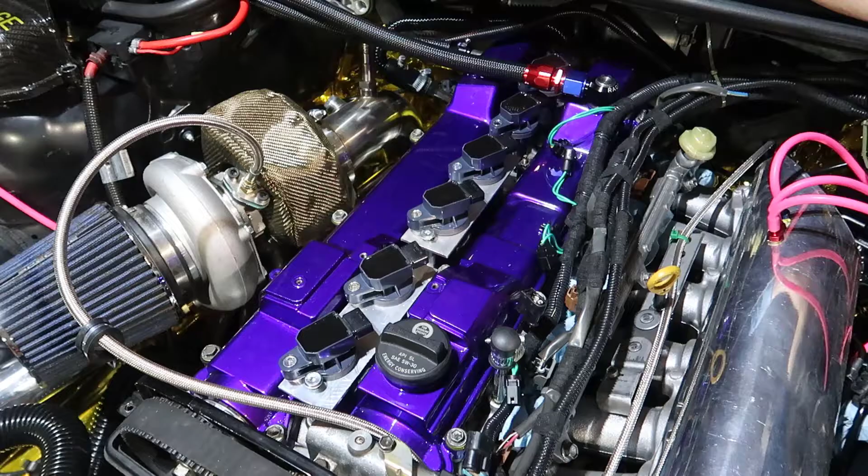Alright, next step for us will be this wire here, this wire loom and all that stuff.

So we have two options. I can rewire all of this and send it that way, which is where the ECU is inside the car, right under the opening on top there where the airbag was supposed to be. That would be faster, quicker, and closer for us. So that might be my route.

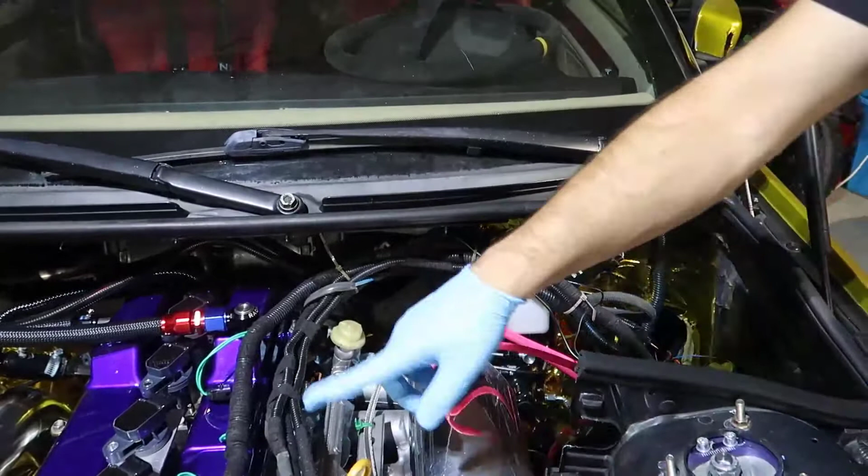Or we can still go this way, but then we go all this way, and the wire goes all the way up and across. I guess we can save wire, and the longer the wire, the thicker it has to be and all that stuff. So I'm gonna cut this here.

Let's undo this one here. Alright, so I managed to bring the wires straight from the ECU through the firewall and up here, which is going to be easy to hold somewhere, to hang it in here, and then come straight down. I don't even need to put the wire loom outside of this spot, it can be even underneath.

Yeah, it's gonna touch the engine. Yeah, I might need to just hang it in here, and I'll have the connectors. The connectors also have wires, so I'll need to trim this wire a little bit. But yeah, it looks great.

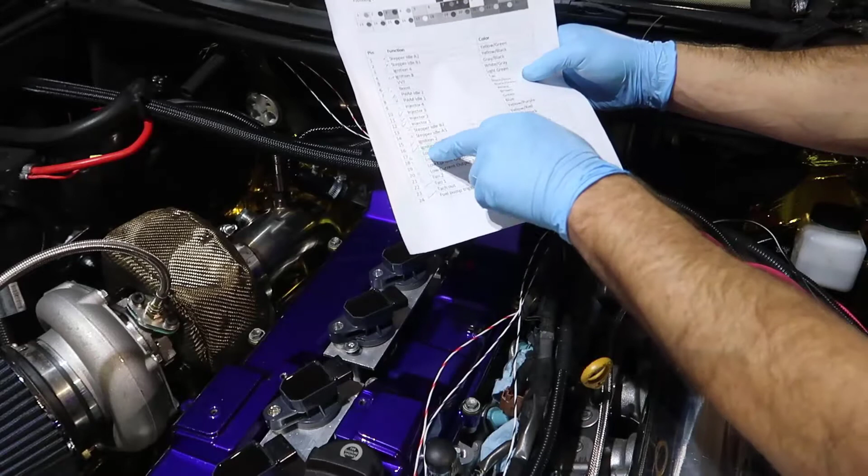So we have the signals. I need to check which is what, but basically, so much drama. I have ignition 1 is white and red, ignition 2 is white and black, and ignition 3 is white and gray.

So this is ignition 1, which is 1 and 6, and then we have ignition 2, which is white and black, and ignition 3, which is white and gray. And so we have that.

We need 1 power and 1 ground. So I'm gonna bring 1 ground from the inside, 1 power from the inside, and basically that's all we're going to need. I'm gonna share the power and ground between all of those, but this is the only thing that I need to merge.

I gotta join those two together, those two together, and those two together, because when the ECU sends the signal, it's going to send to this one and this one at the same time, and this one and this one, and this one and this one.

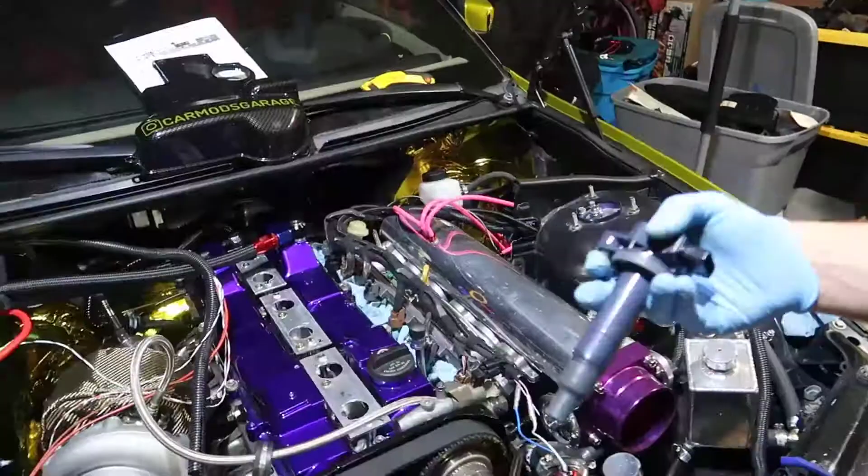Done? Let's do it. The only thing we need to understand is looking at a coil like this. This is pin 1, 2, 3, and 4 — 1 on the left, 4 on the right. Number 1 is ground, so this side is ground.

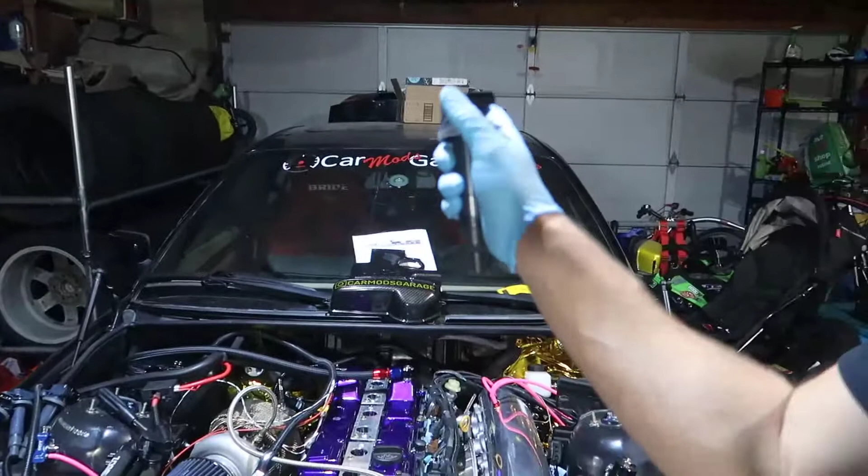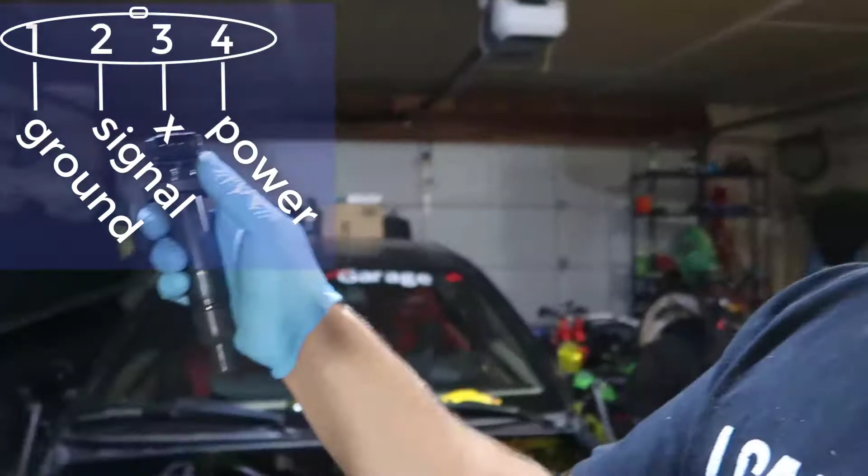The second pin is the one that goes from the ECU to trigger this. The third pin we are not going to use, which tells the ECU that it fired correctly — if it doesn't send that signal, or sends a signal saying it didn't fire, there's a code on the dash. We're not going to use that. And the last one is power all the time.

So ground, power, and close to the ground is the ECU. We're going to wire it now.

So I have my solder iron warming up. I got a piece of wire. So let me show you how this looks now. So I put the connectors in there.

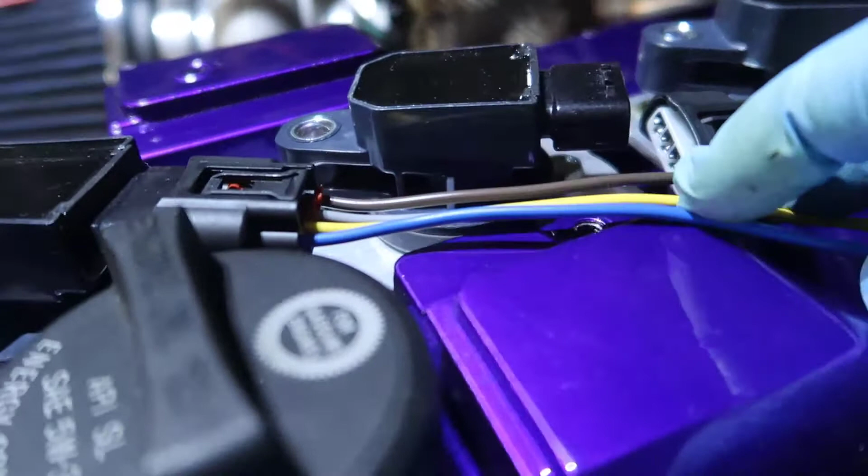I got the connectors here, and I know again that number 1 is negative. This is the wire that goes to the ECU. The gray one is not going to be used, and this one is the 12 volt.

So I'm going to get the 12 volt and split it in 3. Those first 3 are going to have 1 wire, and the other 3 are going to have another wire, and at the end I'm going to merge all those wires in here, just so I can have some flexibility on the wires.

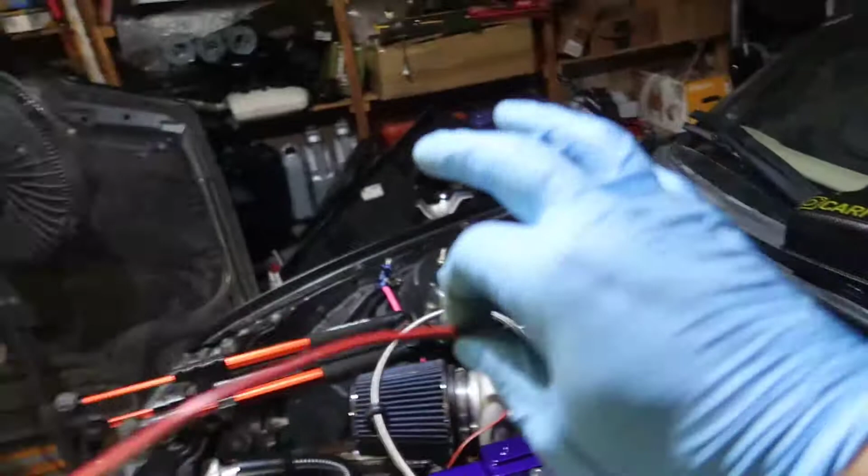So I'm going to solder this first one right in here. Then I'm going to go to the second one, see where it ends, and open a little gap in here, and solder the other one in here. I'm going to open a gap, but enough so I can put a heat shrink still and heat it up so it gets very tight.

So yeah, let's get the first one. So don't do like this, because if you burn your knees, it's on you — it's not my fault.

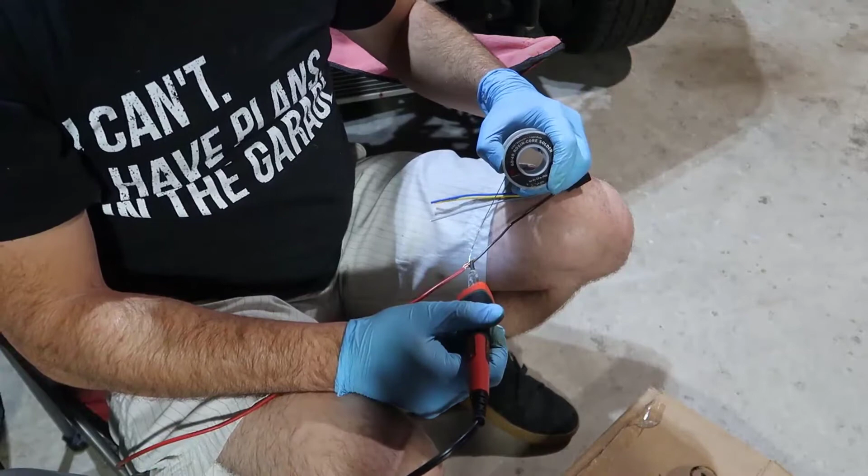So this is, oh, it's hot. So this is all coated. Now I'm going to put a heat shrink, and this is going to be good.

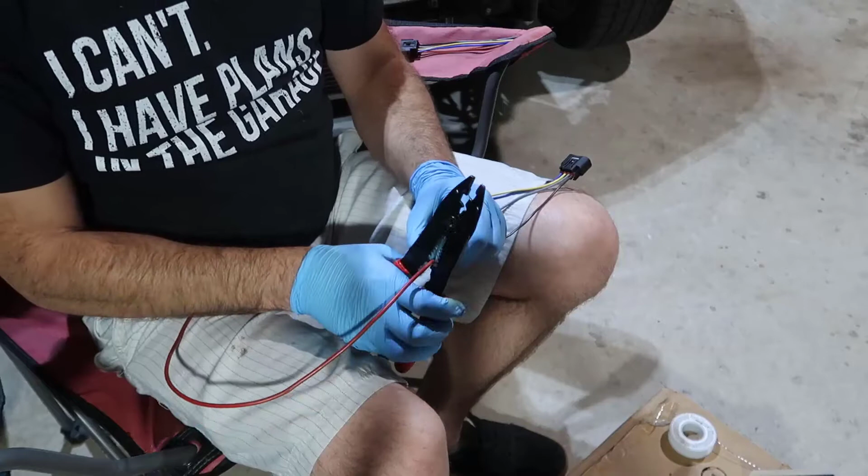And then we're going to go to the second one, which is going to be somewhere around here. I measured the second one. The second one is going to be soldered right in here. So this is the trickiest thing now, because I need to take a little piece out of there, but not a lot. So I need to be sure that this is cut through.

There you go. I don't even know if this is the right way to do things. It's just how I'm doing it.

So now I want to make this go inside that, and then I'm gonna wrap around. And this is gonna be pretty solid. I just need to be sure that all the sides are coated. There you go.

Alright, and now same thing. We got a little heat shrink. Let it cool for a minute, because if the heat shrink gets in there, it's going to shrink before it can go through this big chunk.

But yeah, it did. There you go. Now we're gonna shrink this and go to the third one.

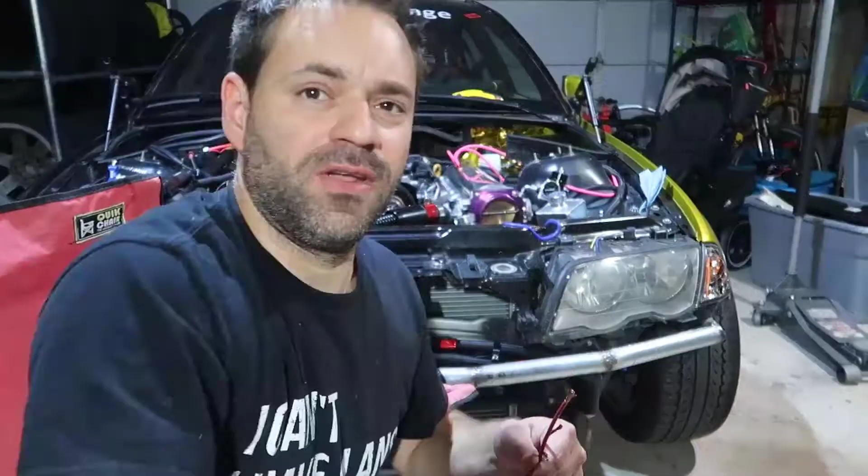So as I was doing this, I decided to do one full on 12 volts, so that 12 volts feeds everybody. So I have 5 in here, and the sixth one I'm gonna put at the end. I might put it together as I'm soldering with the one that's going to go through the firewall. Otherwise it's one more cut, one more everything.

I mean, I could do that regardless, but my plan now is to get 2 ground wires. I'm going to split the ground wires in 2. So I'm going to get the 3 first ones, and share a ground wire with those 3, and I'm going to get the 3 second ones and share the ground wire between those other 3. Those 2 ground wires go to the ground that is right there inside that little compartment.

You're gonna see when we get there. So I'm gonna do the same thing. I cut and solder that way we were talking about. So you see here the Italian clothes hanger thingy.

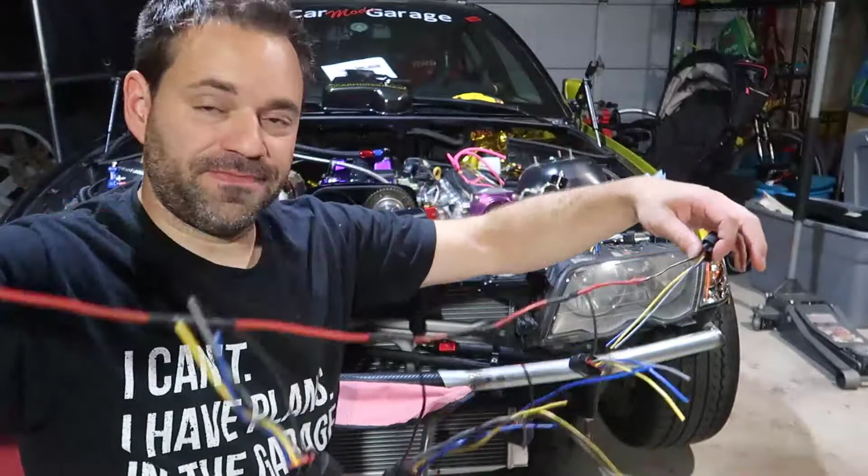Yeah, so let me do the ground now. By the way, the ground is blue, which is number 1. So we did number 4. Now we're gonna do number 1.

Alright, so this is how it looks like now. I have positive running through all the terminals. I have negative through the 3 first terminals, which is pretty organized, so I can group them together. Of course, if you're grouping it together, I can group them, and have a thin wire loom running through the engine, the head of the engine.

So I'm gonna run the second ground. One disadvantage of doing this thing that I'm doing here, cutting and opening a space and all that stuff, is if I mess up and break any wire from the inside, it's no good. So I need to basically throw the whole positive or the whole negative away and start it again.

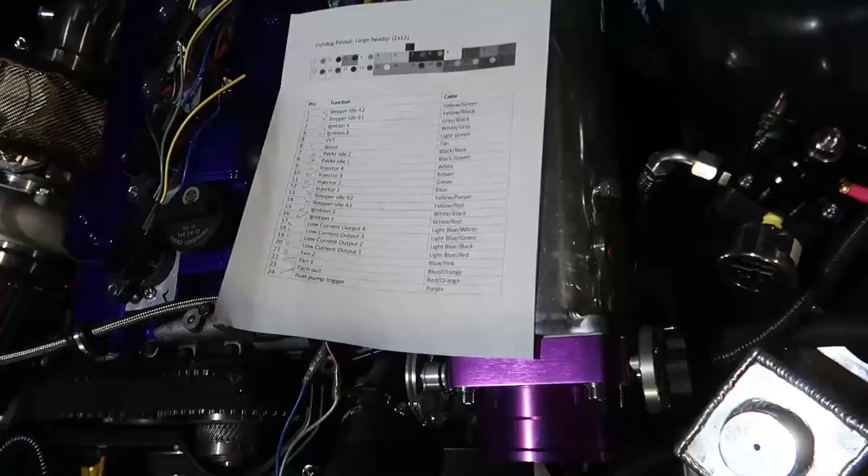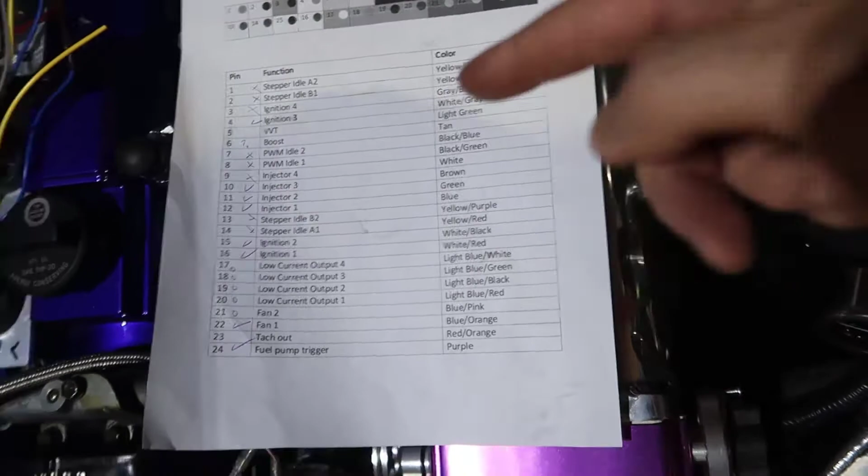So let me do the second one, and the last one will be the yellow. Okay, my idea now is get the ignition. So you have ignition 1, 2, and 3. 4 is white and gray. It doesn't matter which pin is there, but it's white and gray. So I have there, coming from straight from the ECU, white and gray, and it's long enough.

So my idea is to route this guy - sorry, I'm doing this as I hold the camera - route this guy through here on the wire loom that I don't have yet in there. Then I'm gonna route through here, right?

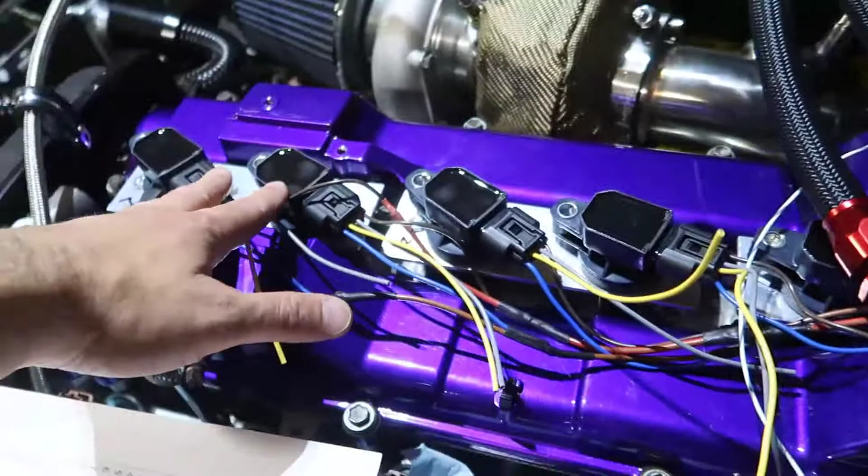And I have enough. So I'm gonna get the yellow here and the yellow here, which is 3 and 4. So 1, 2, 3, 1, 2, 3, and 4. I don't even know how to count. 1, 2, 3, 4. So 3 and 4 together, I'm gonna get those two and wire them together straight on the ECU.

All right, one is done. I gotta do the other two. It's gonna be pretty clean, and it'll let me start my engine, so I'm gonna finish those tonight. It's 12 o'clock already, I won't be able to start the car tonight, but I'm excited.

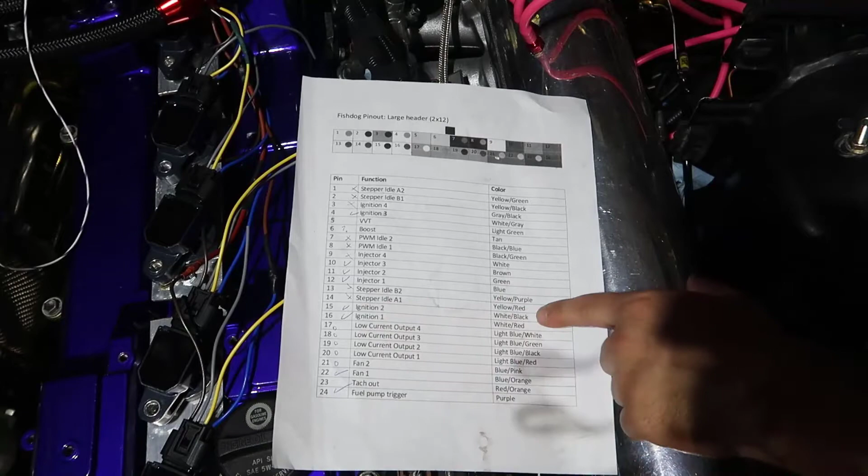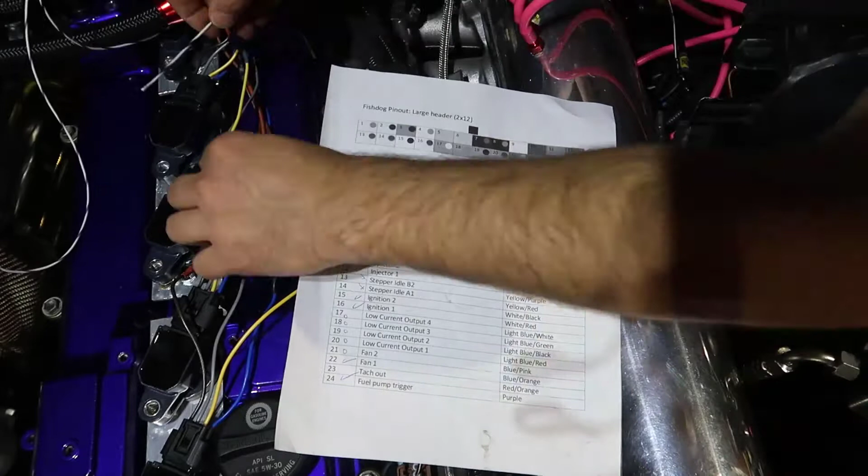Let me finish that. So ignition 2, pin 15 is white and black. So white and black is going to be the one that merges 2 and 5. I'm gonna do exactly the same thing: put 2 wire looms in here, solder in there, and do the same thing to the 5th one, which is right in here.

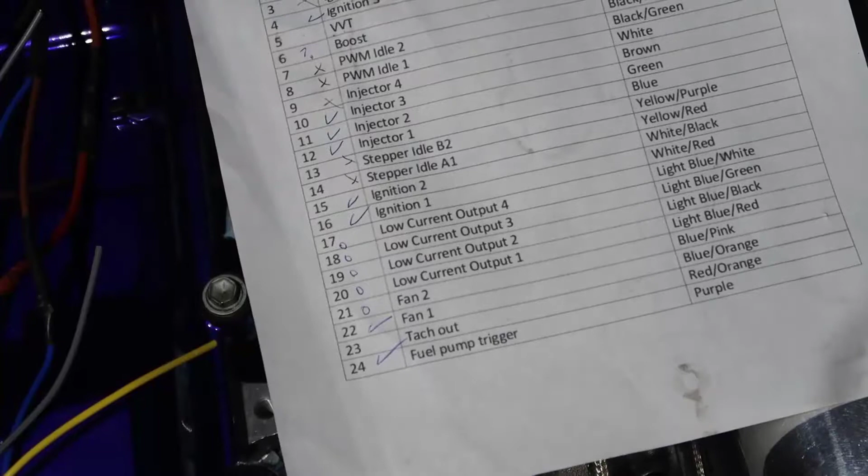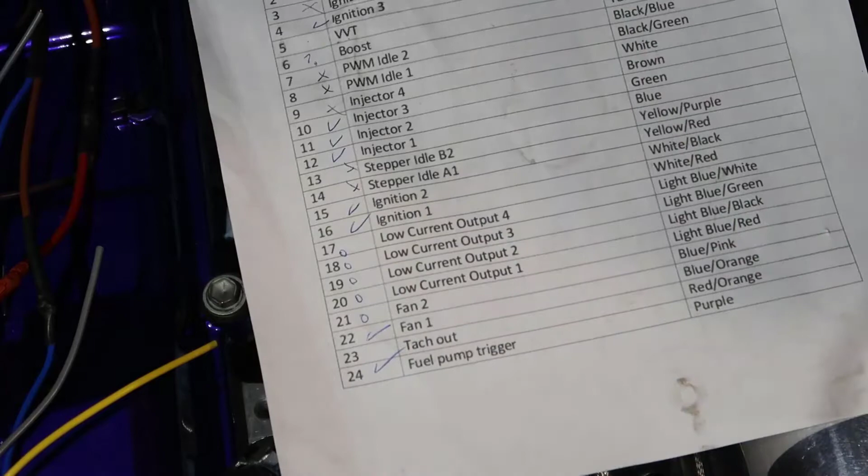And to finish, we have ignition 1, which should be the first one, right? Which is going to use the white and red, so this one is going to connect the first guy and number 6. All done. The battery died on the last one, but yeah, I got it done.

Just to confirm, we got the paper here. Ignition 1, white red, should be connected to number 6, which is outside here, so it's perfect. Then we have 2, white and black, connected to 5, also done. Then we have ignition 3, which is white and gray, connecting 3 and 4. So yeah, this is all done.

That is how we upgraded from the old style thingy to 6 coils, and we use smart coils. This here I'm not gonna use for now, but if you have an ECU connecting to the normal ECU, this is actually the return. You gotta put them all together in one and then go that way.

We're just gonna put the wire loom and wrap it up, but dude, that's way nicer than I expected. It's a little bit more organized. I put one wire loom in here, so we need another one that will merge into this guy, and so on. As you see, it's gonna be pretty clean, and I can just tuck this guy in there.

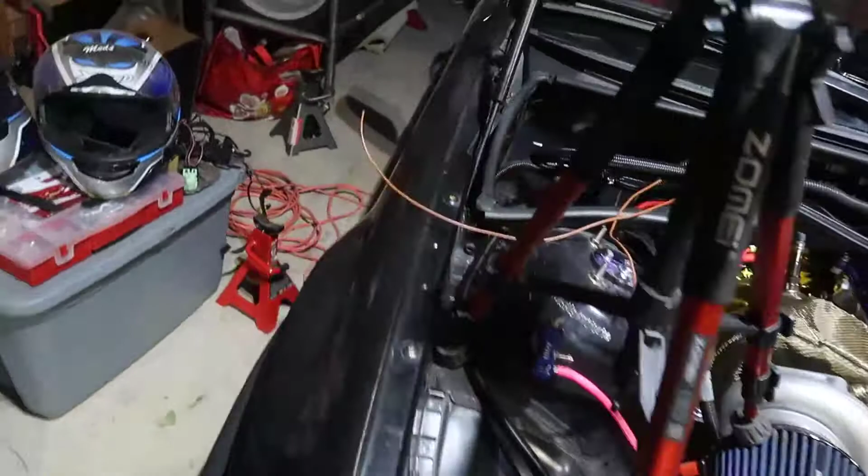Just need to put those guys on now. This here is inside, I just left this here because there's some leftover. I might need to cut this here, which I'll use on that side. Those 2 guys here, I'm going to just put a little terminal and then connect on this here.

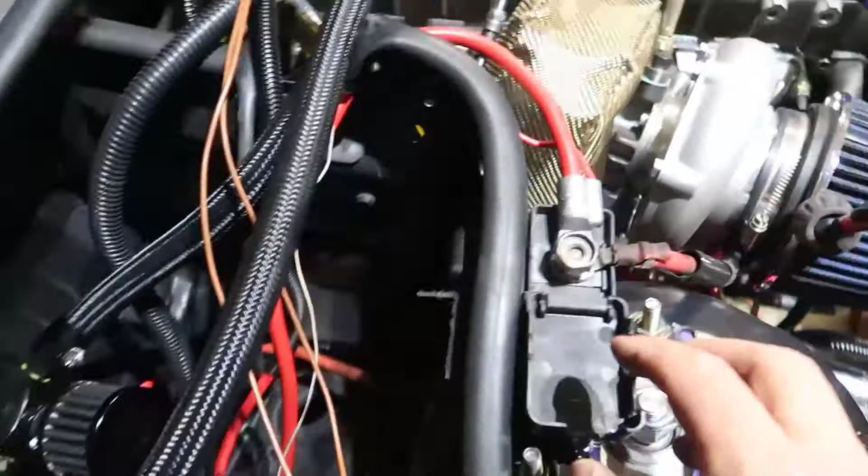This is pretty cool, BMW has this thing here, those 2 positive and negative on the front of the car, so we can just use those guys. It's gonna be tucked in that way. I can even tuck it in on the side here, I can put it pretty much anywhere. Doesn't need to come all the way here, but it's gonna be good.

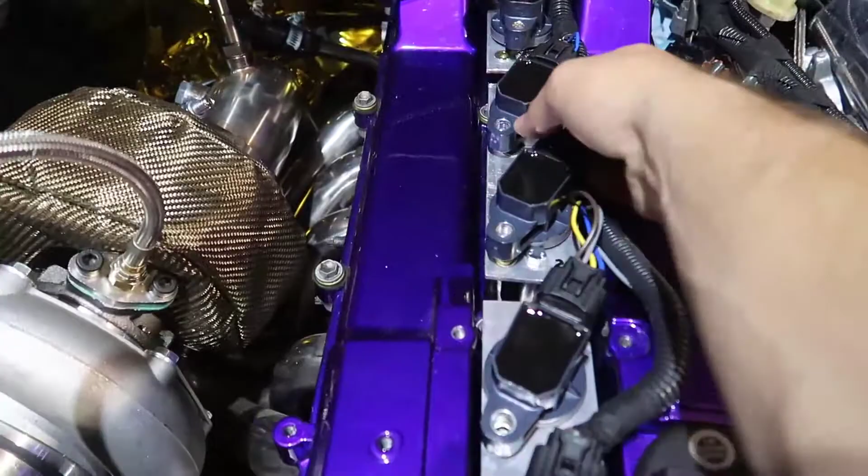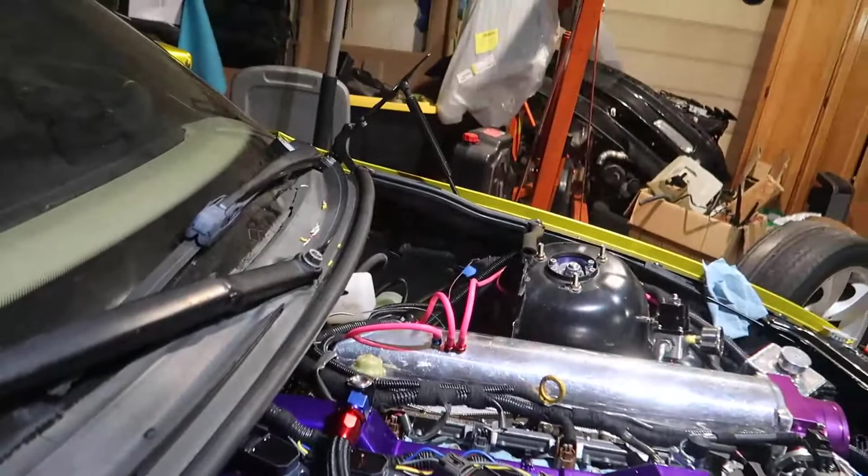Cool, so let's finish that wire loom. All right, all done. I'm gonna tuck this in, put the bolts in there, but yeah, that's pretty much how it's gonna look. I'm pretty happy, honestly, with the result. Did not expect it to be that good. I'm being very modest, but yeah.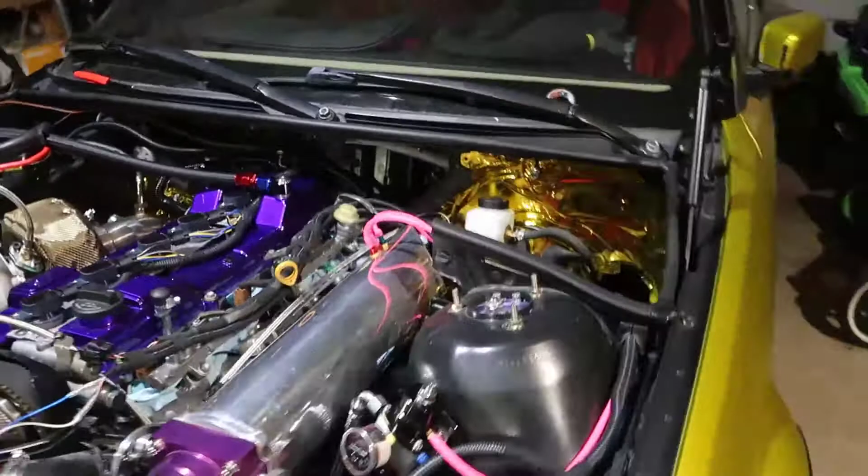So this is a way that we can convert from the old coils, as you saw here, those old guys, and I also had the Supra ones, and I convert to these ones now, which are going to allow me to start the car. I still need some very thin wire loom like this to put here. I did not have those, but they cost like $1 a bag full of it, so it's not a big deal.

My son is testing for COVID, so we can't get out of the house. I won't be able to get it. I'm not gonna order on Amazon and wait for it. Well, I might need to do it, but I'm not gonna wait for the thing to be here so I can make the video.